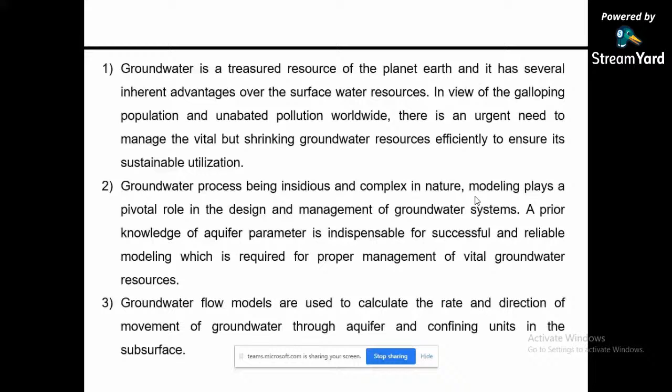Groundwater processes being insidious and complex in nature, modeling plays a pivotal role in the design and management of groundwater systems. Prior knowledge of aquifer parameters is also required. Groundwater flow models are used to calculate the rate and direction of movement of groundwater through aquifer and confining units in the subsurface. The transport models estimate the spread of pollution concentration in the groundwater regime.

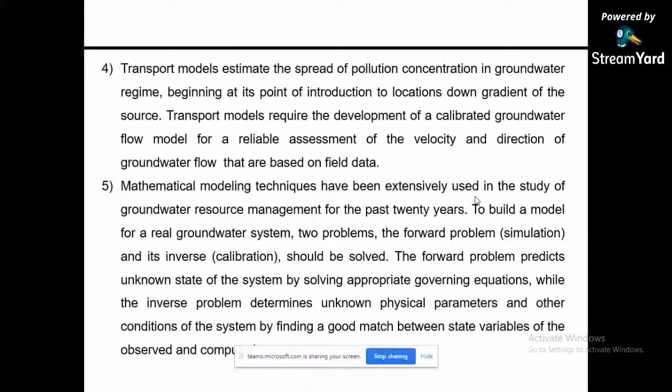Mathematical model techniques have been extensively used in the study of groundwater resources management for the past 20 years. To build a model for a real groundwater system, we need two problems: the forward simulation model and its inverse, that is the calibration or prediction model, both to be solved simultaneously. The simulation problem predicts the unknown states of the system by solving appropriate governing equations, while the inverse problem determines the unknown physical parameters or coefficients and other conditions of the system. So the main objective here is the coupled flow and mass transport parameter identification model.

Here the flow parameters are hydraulic conductivity, transmissivity, storage coefficient, and the solute transport parameters are longitudinal dispersivity and transverse dispersivity. These are the parameters we have estimated. So the main objective is to estimate the flow parameters and mass transport parameters simultaneously.

So we need two simulation problems: one is the flow simulation problem and the solute transport simulation model. To estimate these parameters simultaneously, we have to couple these two simulation models. The next step is the study and analysis of the coupled inverse modeling solutions for various conditions, then the formulation of the inverse model. The inverse model is nothing but estimating the parameters.

First, we have to develop the coupled flow and transport simulation model, and that has to be coupled with optimization methods. There are so many optimization techniques; as we know, we have conventional optimization techniques and non-conventional optimization techniques.

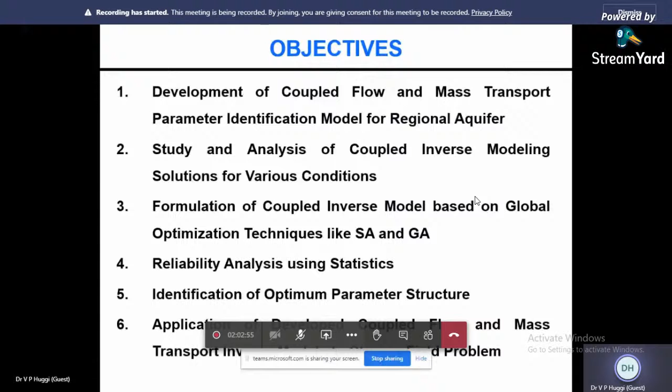The estimated parameters and their reliability are analyzed using statistics. Then the identification of optimum parameter structure. Then the developed coupled flow and mass transport model is applied to the field problem. So now, the inverse modeling procedure: how does it start?

You can begin with certain input parameters or input values, parameterization, then the input observation data. In groundwater, the input observation data here are head variations in the aquifer, then concentration variations in the aquifer, then the initial guess of the model parameters. Initially we can guess the constants embedded in the governing equation; they have to be guessed or assumed.

Then the objective function: calculate the head and concentration distribution using the flow and mass transport simulation model, that is the FEM model. Then the system is simulated. So to simulate the system, or to calculate the head and concentration, we are using the FEM model.

Then the objective function is the sum of the square of the head and concentration residuals, and this objective function is minimized. Has the convergence criteria met, if yes, the estimated parameters and their reliability analysis are done using statistics. If no, then the parameters are updated and again the values of head and concentration are calculated.

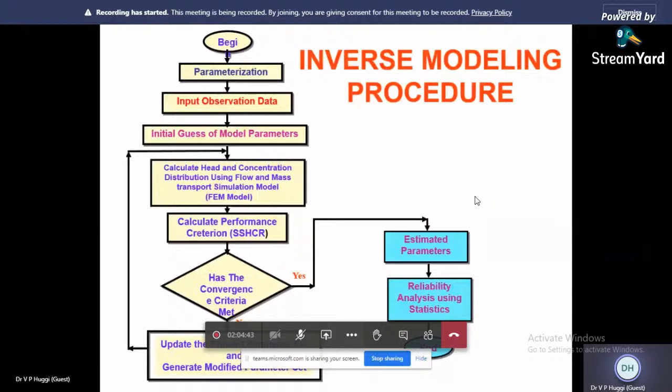Because the ground, the soil or the aquifer, is heterogeneous in nature, meaning all the state variables and parameters are varying with respect to time and space. So at every point it becomes very difficult to model this 3-dimensional problem, so to make it simple...

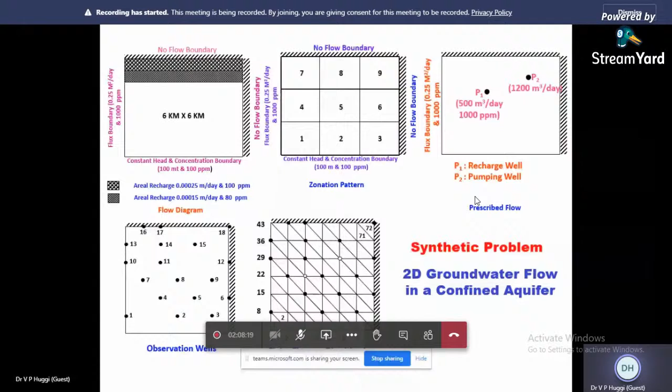The governing flow equation involves d/dx of Txx, the transmissibility. This Txx is the variation of T in the direction of x, on a plane whose normal is x, and h is the state variable, the head, and the variation of h with respect to x. This is the two-dimensional problem.

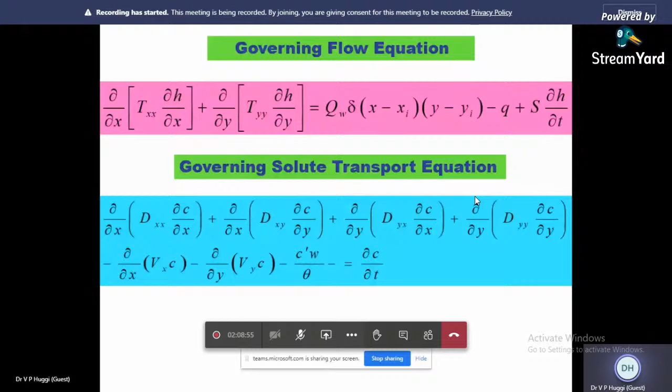Next is the governing solute transport equation. These differential equations have to be solved using the Galerkin finite element technique. After solving the governing differential equations using the Galerkin finite element method, we obtain these system equations.

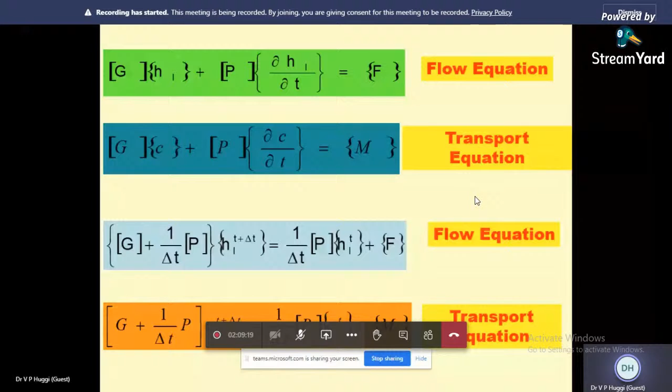After getting these system equations, the next step is the performance criteria, or objective function. Here the objective function is the sum of squares of the simulated head values and the observed head values.

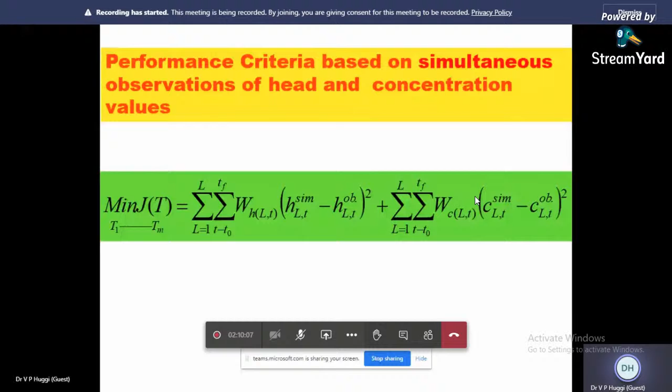Since we are estimating both head and concentration distribution in the aquifer simultaneously, the objective function is the combination of the sum of squares of the simulated and observed head values, and the sum of squares of the simulated and observed concentration values. Using this simulation model, we have estimated the transmissivity, longitudinal dispersivity, and transverse dispersivity.

That is T, alpha L, and alpha T, estimated using the Gauss-Newton Marquardt algorithm, which is the conventional optimization technique. This algorithm needs the derivative of the objective function, so here we need the Jacobian matrix.

As we know, when taking the derivative of the function, we are adding errors. To avoid this, we have also used the global optimization technique. Both T, alpha L, and alpha T are estimated for steady state conditions and also for transient state conditions. Steady state means the flow and concentration variation in the aquifer system is constant with respect to time; in the transient state, they vary with respect to time.

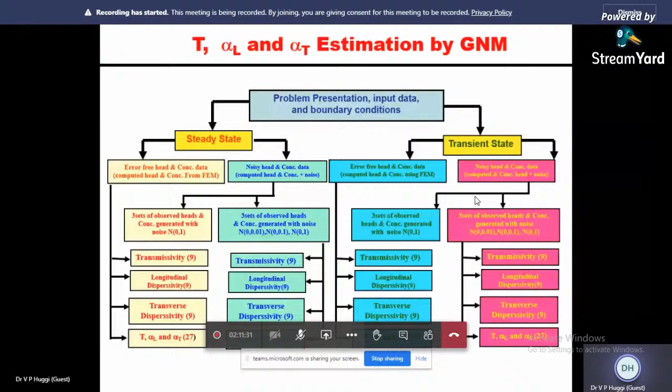In this problem we have 9 zones, so we have estimated 9 transmissivity values, 9 alpha L values, and 9 alpha T values simultaneously. So totally we have estimated 27 parameter values simultaneously.

Then, since this is the synthetic problem, whatever observed values, head and concentration data we use, they are noise free. Noise free means error free. But in actual practice, in the actual field, the data are not error free. They are corrupt data. The corrupt data is mainly because of man-made mistakes or instrument error.

Because of these reasons, whatever data we are getting from the field problem, they are corrupt or noisy data. So it is required to corrupt the data. So here, for the synthetic problem, we have corrupted the data by generating random numbers. That procedure I will explain to you. That is the error-free head and concentration using the FEM model with normal distribution of 0, 1.

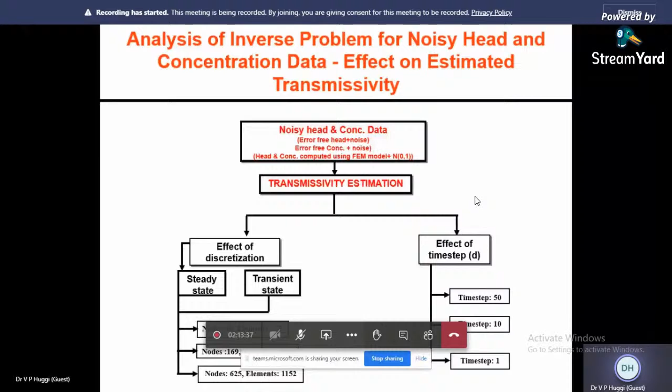288 elements with 169 nodes. In the first problem, it is 49 nodes and 72 elements, and the third one is 625 nodes and 1152 elements. This is just for academic interest. We have analyzed, considering different element sizes, how this discretization affects the solution, the accuracy of the solutions.

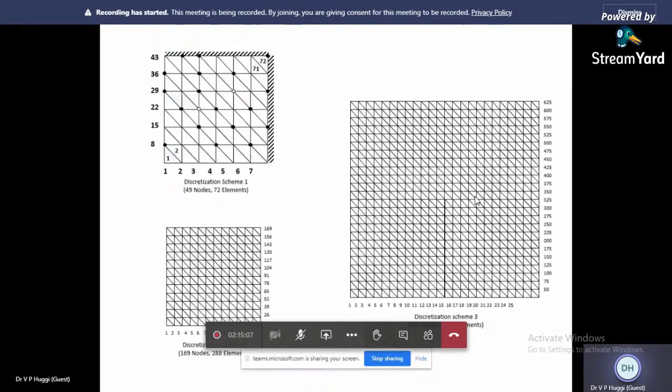global optimum point. Whereas in case of the conventional optimization algorithm, there is no guarantee whether we are going to reach the global optimum point or the local optimum point. That is the only advantage of the genetic algorithm, but it needs a lot of iterations. That is, the computing time is very high. So to avoid this, we have tried to couple both, that is the hybrid model. We coupled both the genetic algorithm as well as the GNM.

So first we have used the genetic algorithm for 200, 300, 400 iterations. When we reach very near to the global optimum point, we send those solutions to the GNM to converge the solution very fast. Only convergence is the problem in case of the genetic algorithm. So in case of the genetic algorithm, how does it work?

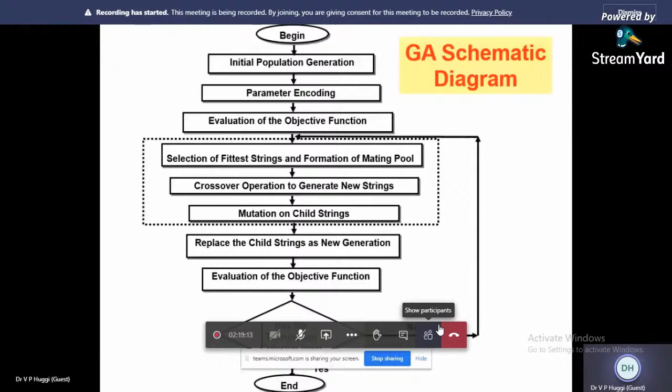Then another method we have used is simulated annealing. This is one of the powerful optimization methods; since it involves a lot of mathematics, people are not using this algorithm, and the applications are very limited for civil engineering problems. Still, there is a wide scope for researchers applying simulated annealing for the estimation of system parameters.

It may be groundwater or any system wherever it is required to estimate the system parameters, we can use simulated annealing. So for researchers, this is an open area. There is still a lot of scope for the application of simulated annealing in civil engineering problems. The only problem is it involves a lot of mathematics.

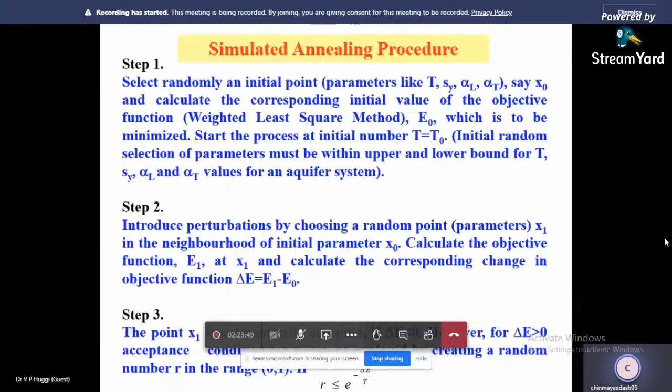Sir, please tell me the book name once again. Yes, madam. Kirkpatrick, K-I-R-K, P-A-T-R-I-C-K. Okay, thank you, sir. This is the Metropolis concept, Kirkpatrick, that is there in the PPT presentation. That book is available only in some IITs, like IIT Bombay, and the Indian Institute of Science. In very limited libraries you will get this book.

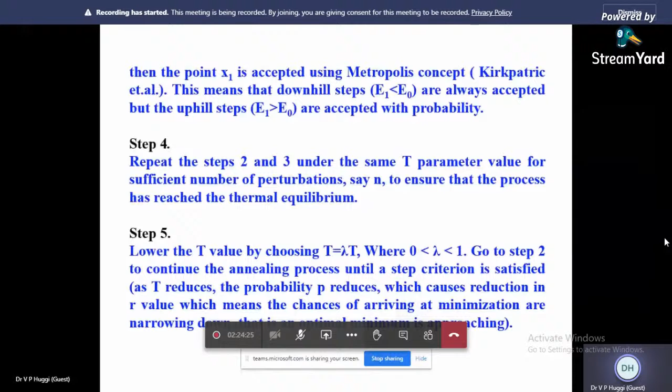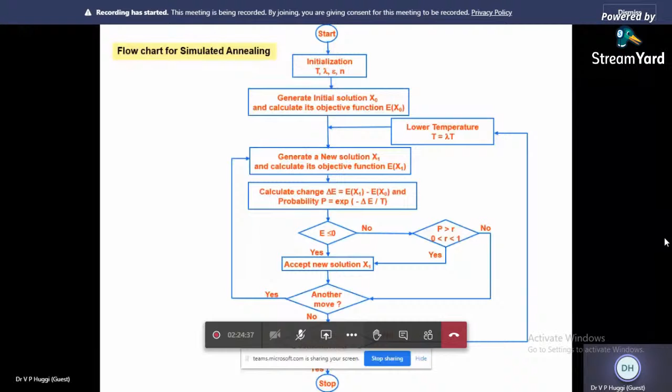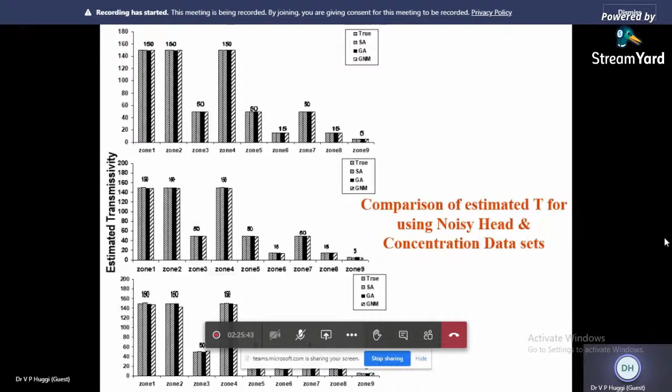Then in the inverse modeling, the next step is the reliability analysis. Because the parameter values we have estimated by using the simulation model, whether those estimated parameters are accurate or not, how much those parameter values are acceptable, that has to be done by using the statistical measures.

So here the statistical measures of overall fit: we have calculated the estimated error variance, EEV, then the correlation coefficient, then the analysis of the reliability of the estimated parameters by using the sensitivity analysis, then the computation of sensitivity coefficients, then the composite scaled sensitivity of estimated parameters, that is the CSS values, for both steady state and transient state.

Then the variance and covariance matrix, the coefficient of variation, and confidence intervals, because it is more important. In this problem, mainly we have considered 90% to 95% as the confidence intervals. So the variation of the parameter values is only 5 to 10% from the accurate values. Then the correlation matrix. So this is parameter estimation and reliability analysis.

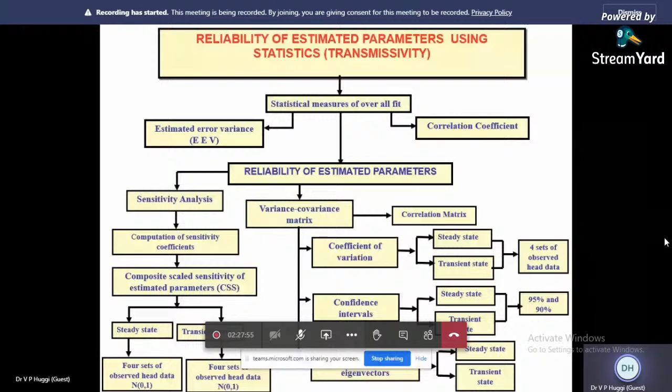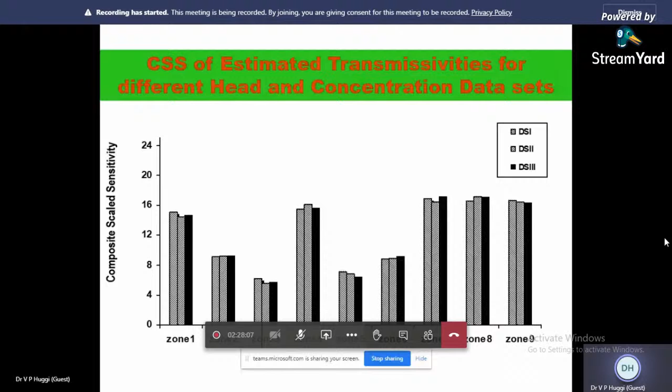Then how the CSS value plays an important role in the transmissivity for different head and concentration data sets. As I have told, the entire aquifer system we have divided into 9 zones. That is called optimum identification of parameter structure. This is also one of the very important steps in the modeling. Especially in groundwater modeling, this parameterization plays a very important role, mainly because the aquifer media is heterogeneous; we considered it isotropic, otherwise it is a heterogeneous medium.

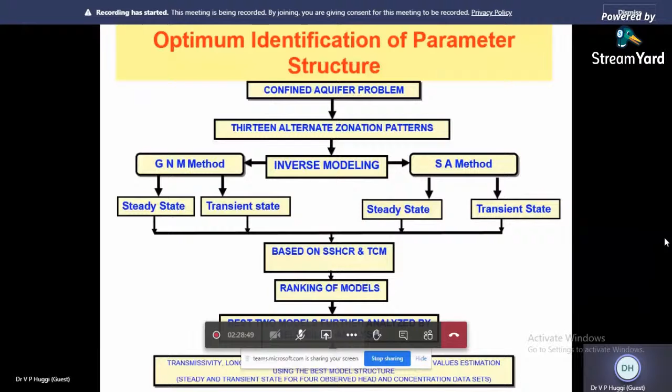So whatever models, the forward problem and the inverse problem developed for the synthetic problem, that is the simulation model and the calibration model, both we have coupled, and this model we have applied to the synthetic problem. Next we have tried to apply this to the field problem. The chosen field problem is the Mahi right bank canal area in Gujarat. It includes Anand and Kheda districts of Gujarat.

In total 8 districts are involved, and the gross command area is about 3,18,000 hectares, and the net cultivable command area is around 2,80,000 hectares. 2,80,000 hectares means nearly 6 lakh acres of land. So we have used this model for this field problem to estimate the parameters. Once we know the estimates, meaning parameter values, that model can be used further for decision making.

How we can make decisions by using the inverse modeling solutions: what is happening in the aquifer system after 5 years or after 10 years, how the heads are varying in the aquifer, and the solute concentration variation in the aquifer. Based on this information, the managers or decision makers can take appropriate decisions so that the aquifer is managed efficiently. So this is the study area in Gujarat, the Mahi right bank canal area.

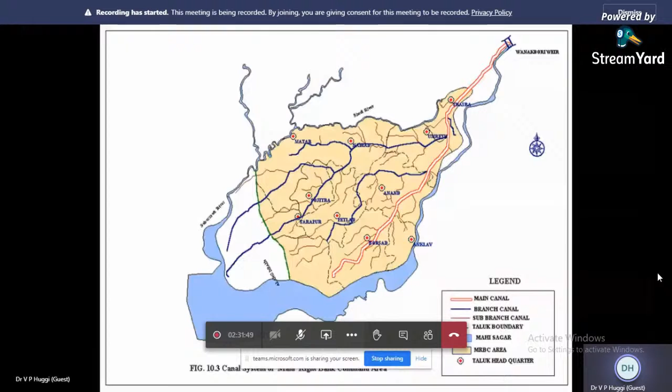It includes nearly 9 districts. There is one barrage, the Wanakbori Weir, constructed across the river in Gujarat. Here the river water is diverted to the canal. This is the main canal system, and there are distributaries. So this is the study area. Mainly this area gets water from the Wanakbori weir, which is the storage structure. These are the various talukas which come under the Mahi right bank canal command area.

These are the contours of the area, and for this entire area we have developed the finite element model, with a total of 395 nodes and 692 triangular elements. This is the zonation or parameterization. The entire study area is divided into 10 zones. In zone number 1, the parameters, the hydraulic conductivity, alpha L, the longitudinal dispersivity, and the transverse dispersivity values remain constant with respect to time and space.

In another zone the values are different. It all depends upon the formation of the aquifer based on the local conditions or borewell data. So we can assess the parameters, and based on that the entire aquifer system is divided into 10 zones. So this is the parameterization, and these are the finite element nodes and elements.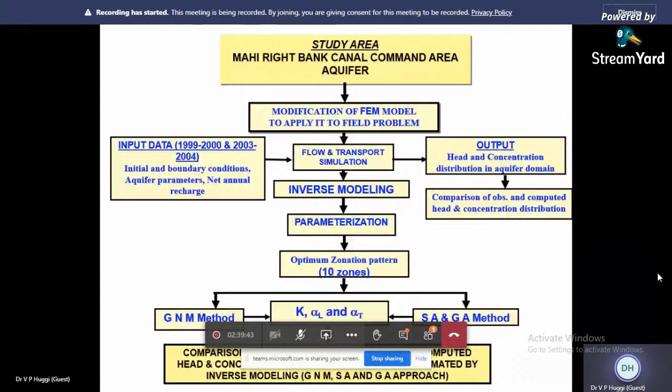Now this simulation model again I prefer. So here we have the problem. Again the same K, alpha L, alpha T values are estimated, that is the hydraulic conductivity, alpha L and alpha T. Total number of zones are 10. We have calculated by using the GNM method, and also estimated by using SA and GA. So these are the hydraulic conductivity values calculated by GNM, SA and GA in 10 zones. 10 zones means we need to estimate 30 parameter values at a time: 10 hydraulic conductivity values, 10 alpha L values and 10 alpha T values.

That's why inverse modeling is most of the time an ill-posed problem: if the number of parameters is more, it becomes ill-posed. To overcome that, you have to limit the estimated parameter values. That is one of the important points: the number of unknown variables must be equal to the number of equations. So that we have to take care of.

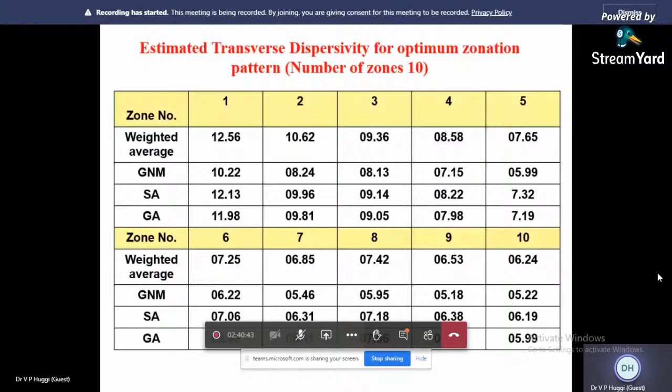So this is the comparison of calculated head and estimated head or the observed head. Similarly, concentrations, observed concentration values from field data and estimated values from the model, and we have compared. Both the contours are running very closely. As I have told, the confidence intervals we have considered are 95 and 90%, 5% variation and 10% variation.

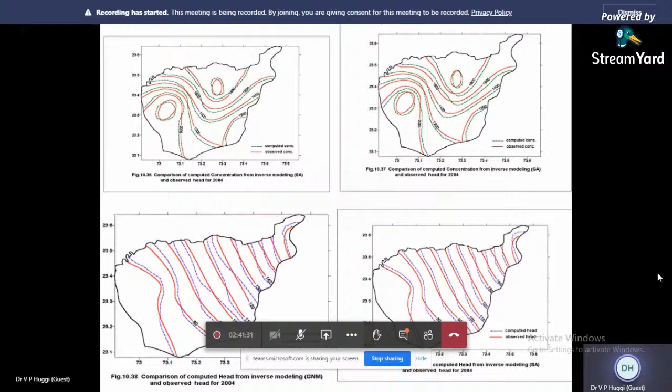So these are the comparisons of the calculated values from the model and the observed field data. So conclusions: this present study concludes that the three algorithms we have used for the coupled inverse modeling can all be used for flow and solute transport parameter estimation, assessing the reliability of estimated parameters.

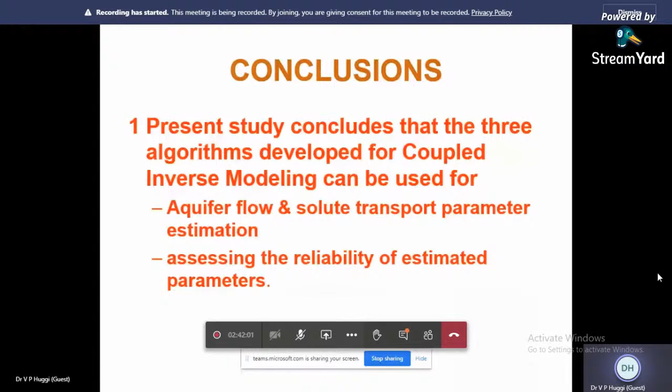The coupled process inversion model based on observation of head and concentration data yields better results. Estimated parameter uncertainty is greatly reduced. Convergence to a minimal sum of squares value was rapidly achieved when both datasets were employed and given equal statistical importance.

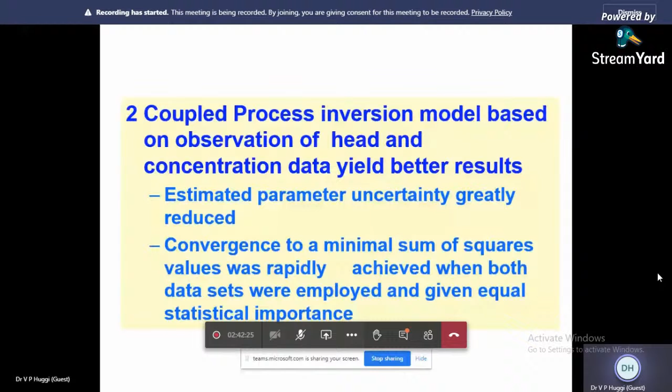The numerical analysis is carried out to check the validity and stability of solutions of the coupled inverse model developed based on GNM, SA and GA. Reliability of estimated parameters is analyzed using diagnostic statistics; the obtained estimated parameters suggest the correctness of the obtained system parameters.

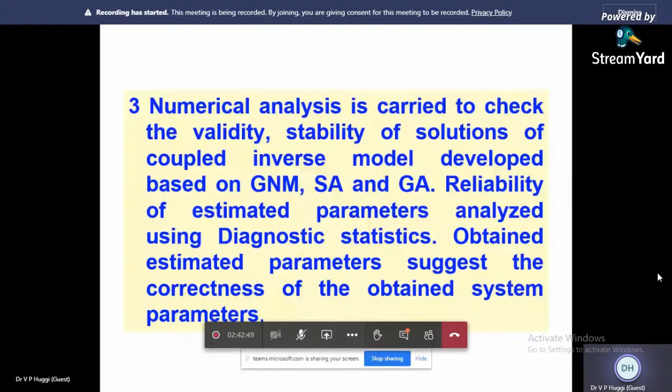Optimum parameter structure, that is the zonation pattern, is identified using the zonation method and based on the SS, that is the sum of squares of head and concentration residuals, and the trace of the variance covariance matrix. This has important implication in modeling of large aquifer regions where often a precise zonation of the entire region is a very difficult choice. So thank you.

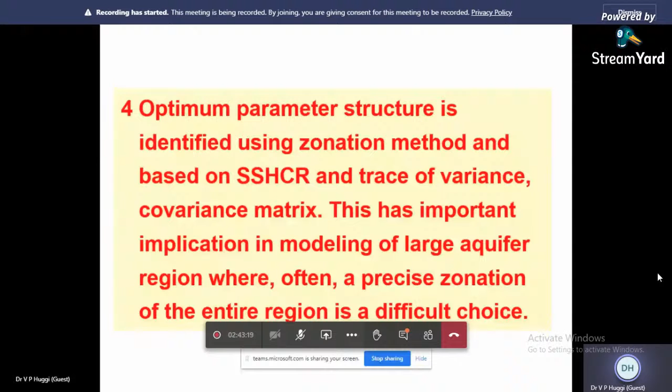Any questions, please? Yes. Sir, there is one query from the participant end. Yes. Sir, on what basis have the zones been divided into 10 numbers? The query has been asked by one of the participants.

is to be decided. For this, you can start initially with 3 or 4 different parameter zonation patterns. That is, you can divide the entire zone into 5 zones, 8 zones, and 10 zones, and analyze which gives you better results between the model and the actual observed data. If the variation is very less or both are closely matching each other, then you can make use of that zonation plan. Okay.